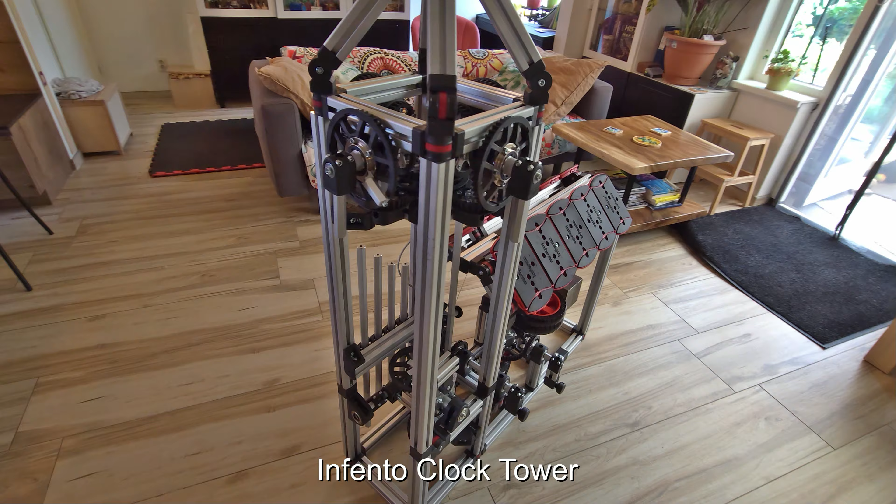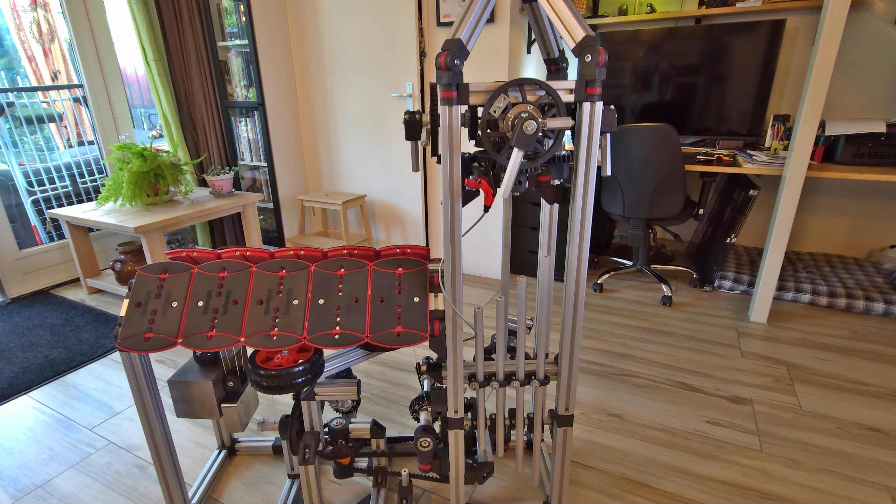The clock tower is made almost exclusively from Infento components, with only a few exceptions which I will explain through the video. I use Infento version 1.0 because I bought the first Genius set already in 2019 and I extended it by many extra parts since then.

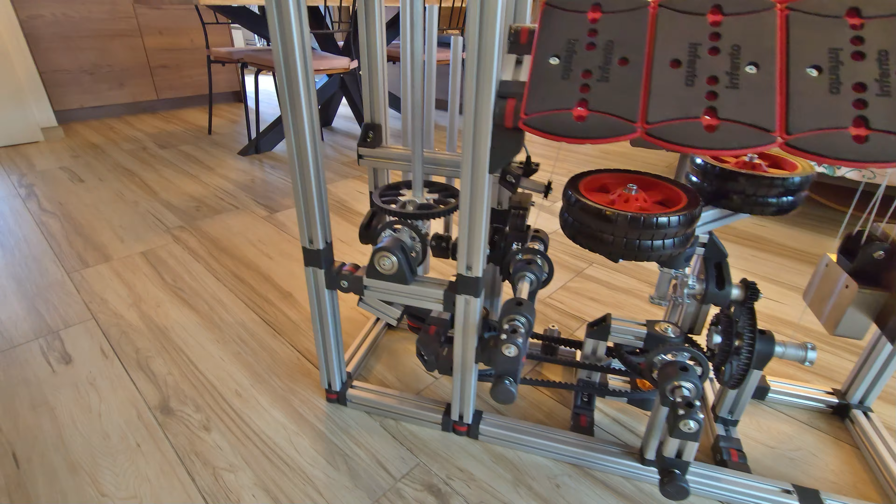So let's jump into the functions. Clock needs energy to run. I could have used an Infento electrical motor, but that would have ruined the beauty of the replica of an old mechanical clock. I got a 20 kg weight, which can be lifted about 40 centimeters above the ground.

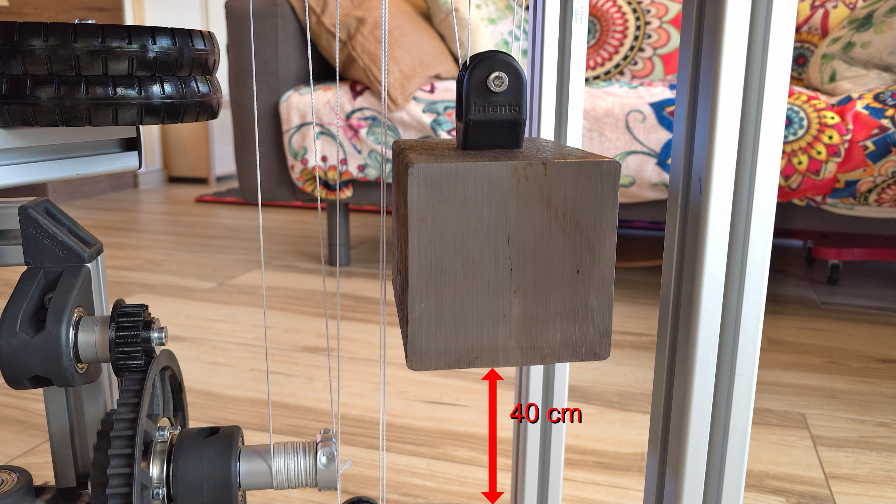The heavier the weight, the slower it can be lowered to produce the same mechanical work. I use pulleys to trade pulling force for longer run. The pulleys are 3D printed and I presented them already in several previous projects.

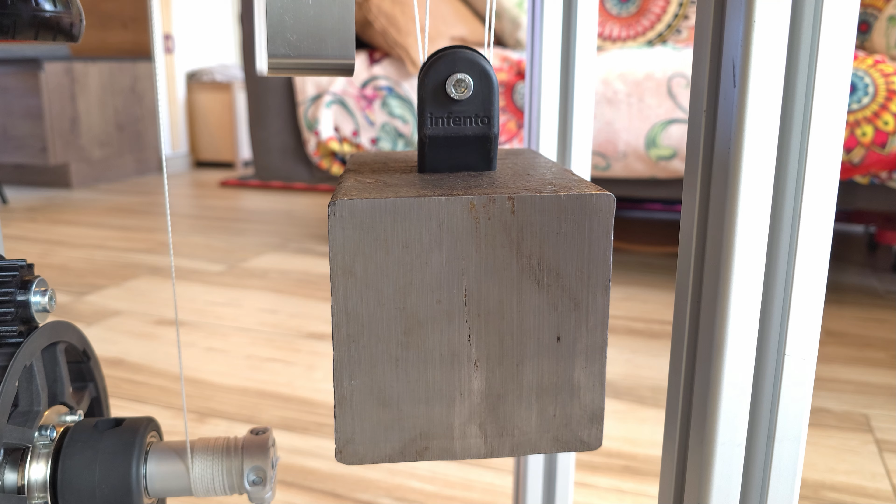After many tests, I set the pulley reduction ratio to 1:4, which means that the acting rope pulls with 5 kg or 50 newtons of force over a distance of about 160 centimeters.

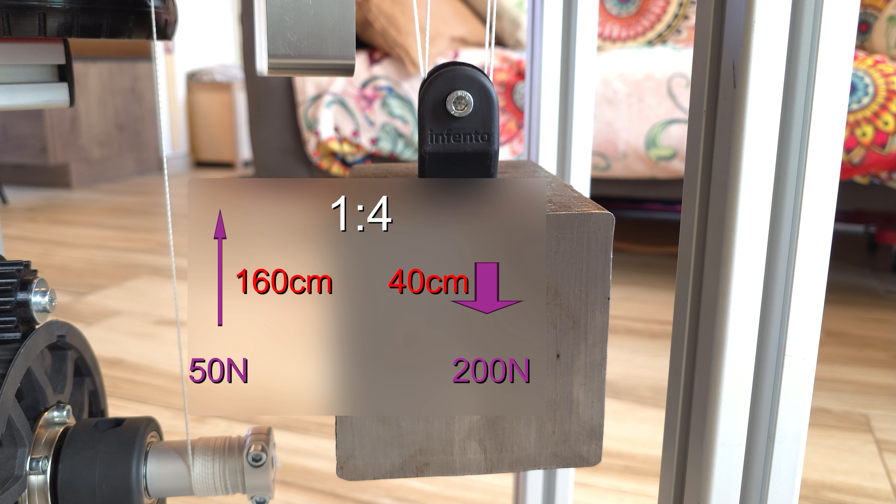The most force I needed was obviously to overcome friction in the system. And with 25 gears, 2 tooth belts and 17 active bearings, the clock has plenty of friction.

To be able to wind the clock, so to lift the weight, I needed to add a ratchet mechanism. For that I use an Infento freewheel, which can freely spin in one direction but locks in the opposite.

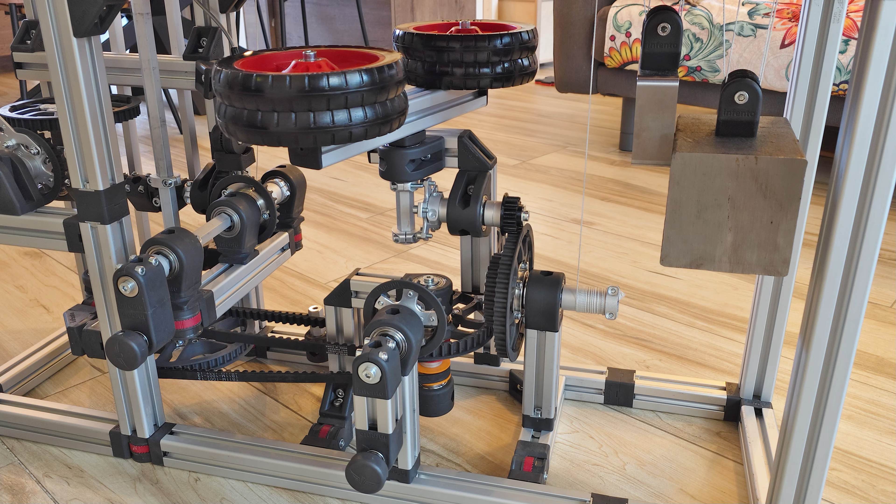Another component mechanical clocks usually have is some kind of escapement mechanism to generate the ticks. After some reading, I decided on the verge escapement with foliot. The escape wheel, also called crown wheel, is here created using an Infento flange with bolts, and the foliot is this horizontal oscillating bar.

The benefit compared to the verge escapement with pendulum I used before is that it can generate slow movement in more compact form. As you can see, one tick-tock cycle is about 2 seconds. A pendulum with the same period would have to be about 1 meter high.

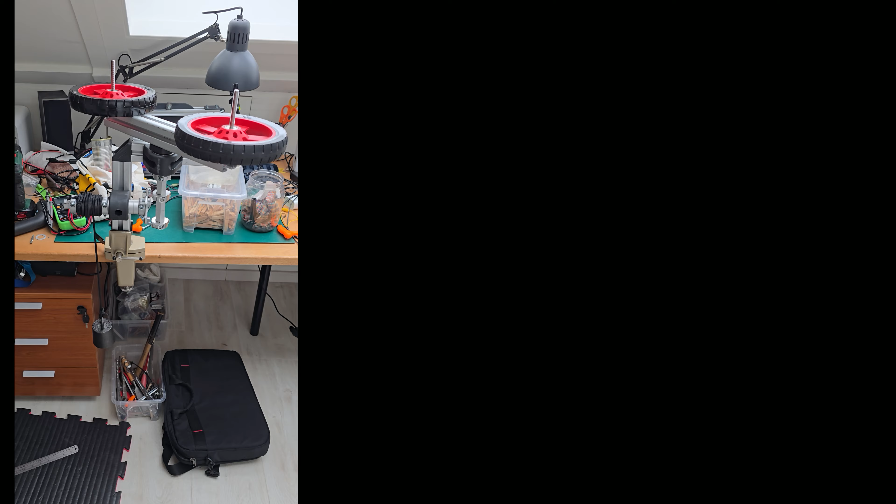The speed is adjustable using the weight and position of these 7-inch wheels mounted on the foliot. More weight and further from center, more inertia the system has and slower it accelerates when the same momentum is applied. The important bit is of course this verge or crown wheel.

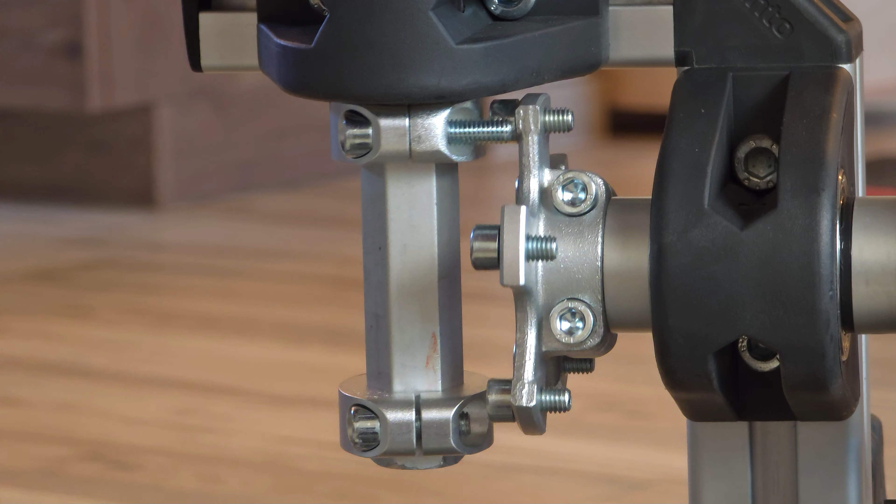In half of the period it accelerates the foliot in one direction until it slips and then the opposite tooth takes over to stop and accelerate the foliot in the opposite direction, and so on.

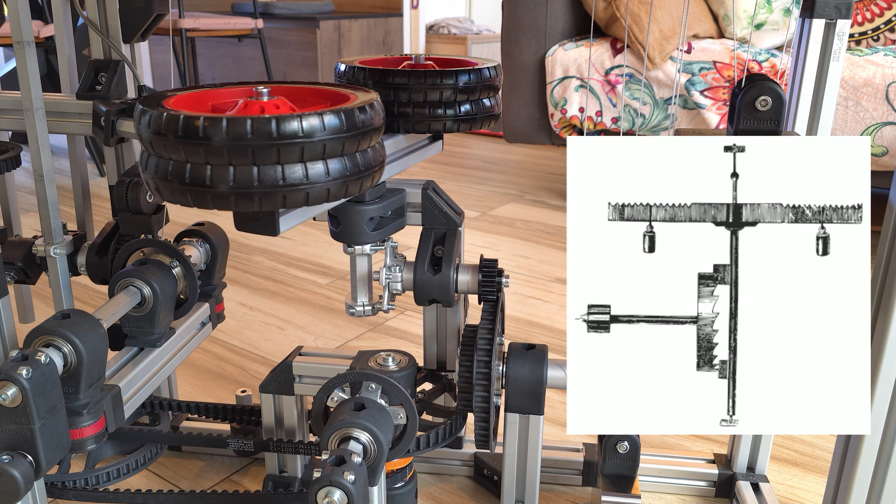On Wikipedia you can read that the verge escapement with foliot is the oldest known type of mechanical escapement used for timekeeping, dating back to the 13th century.

The crown wheel gets its energy from the weight via this 3D printed 13-tooth gear. I could have used the original 26-tooth gear, but I wanted to get more tick-tock periods per weight movement. In this configuration, the total runtime is about 10 minutes before the weight gets on the ground.

So, with the energy source and escapement mechanism, we have good basics for a clock. The most important aspect of this project was for me to create a functioning 4-phase clock tower. This is actually how I started the project.

Just playing with 2 standard Infento gears in CAD and trying to get this mechanism to work. I recently figured out that I can use the gears as bevel gears attached at an angle.

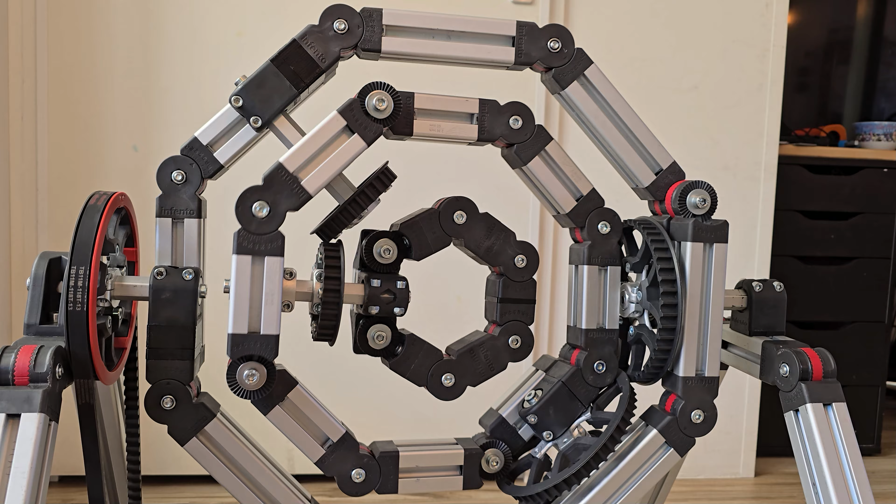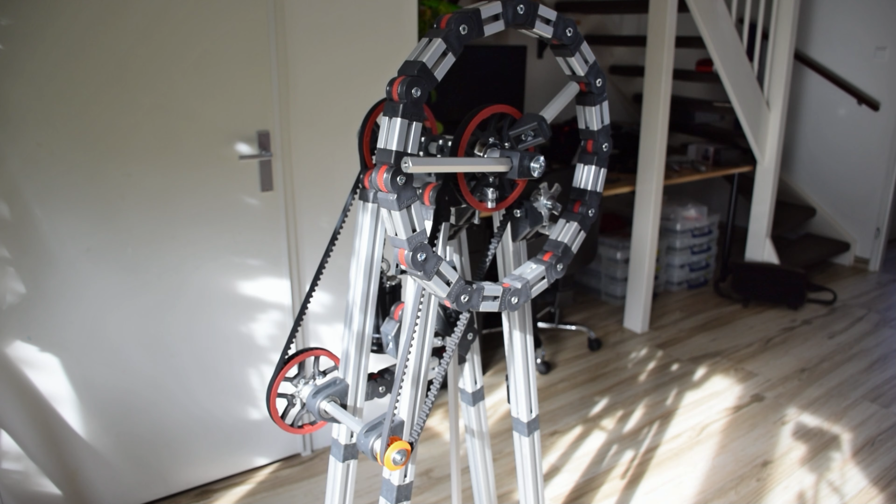And from my previous clock creation, I knew that I have to use freewheels to be able to put the minute and hour hand on one axis. If you didn't see that one, please check that video. If you got so far here, I think you will like it as well.

So I started just with the basic idea I had in my head, but in this configuration the gears could not move, they were interlocking each other.

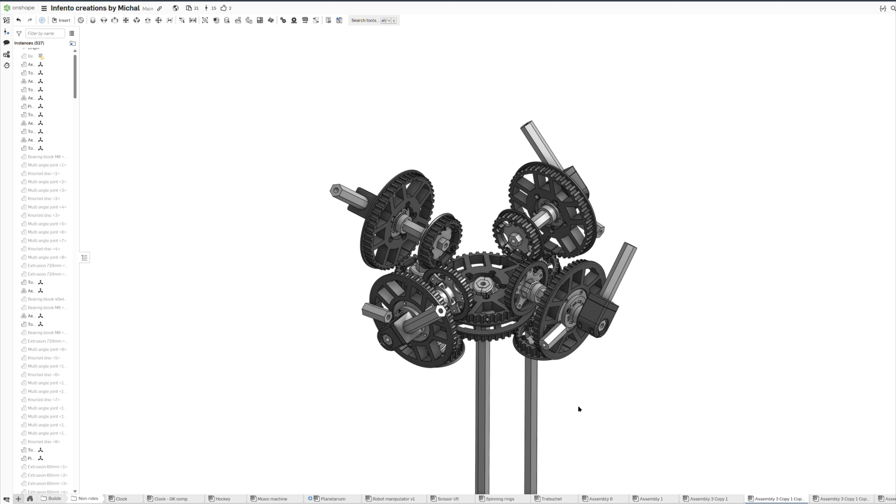The eureka moment came when I figured out how to drive both the hour and minute hand on all 4 faces without the gears colliding. The important bit is that the horizontal bevel gear must be larger than the vertical ones to prevent locking.

That was easily done for the minute hand, but for the hour hand I had to add 4 intermediate gears to create the necessary space.

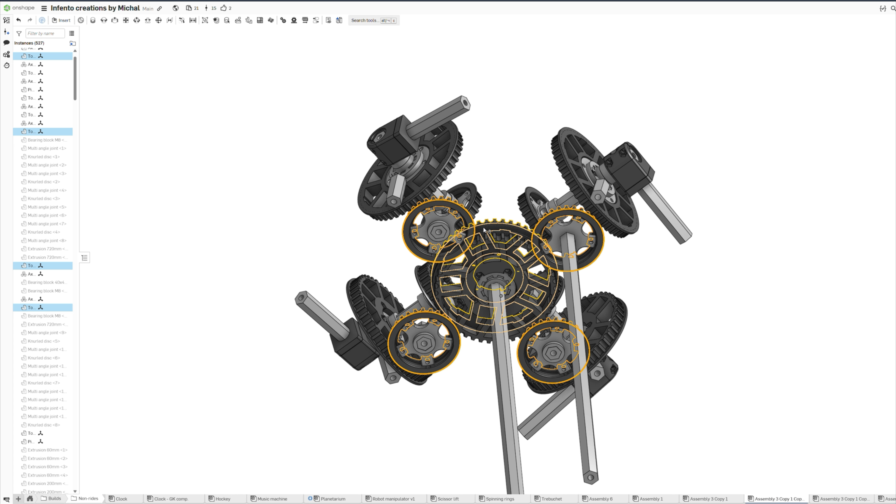And where 2 gears are on one axis, I use freewheels in the correct orientation to allow independent rotation. Fortunately, the clock needs to run only in one direction. The minute hands are driven by the center axis and the hour hand by the other one.

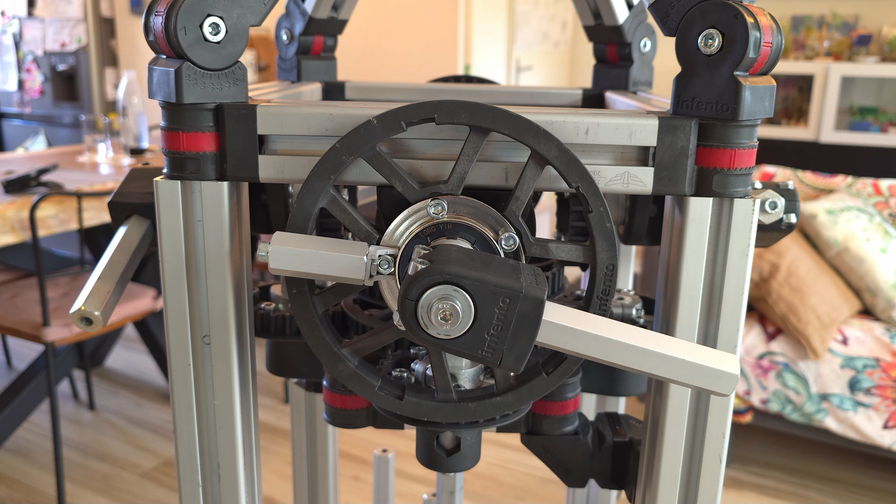They are linked at the bottom by a belt system with other gears to create the proper hour-to-minute movement ratio, which I will try to explain next. So you know the minute hand needs to rotate 12 times for one revolution of the hour hand.

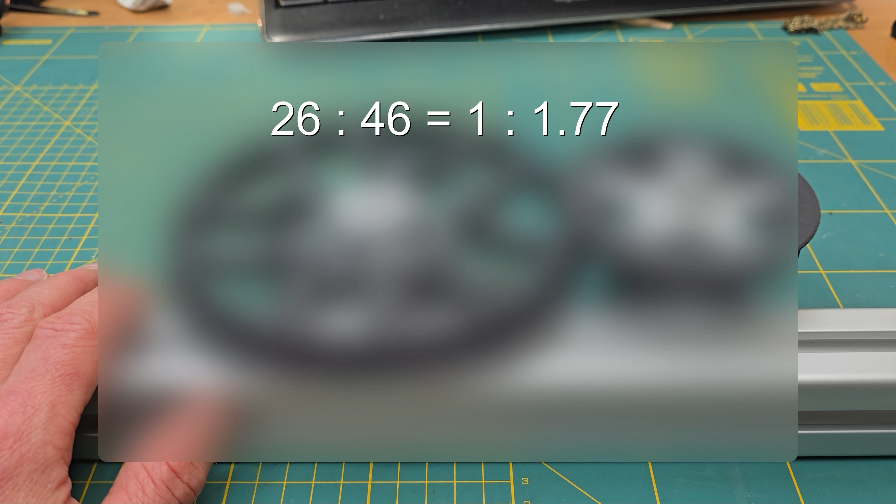But looking at the original Infento gears, we have only 26 and 46 teeth. That means with one gear set, I can only create a ratio of about 1 to 1.77. Using only these gears, I could stack 4 of them to get a 1 to 9.8 ratio, or 5 to get 1 to 17. Both solutions are not optimal and visually probably very noticeable.

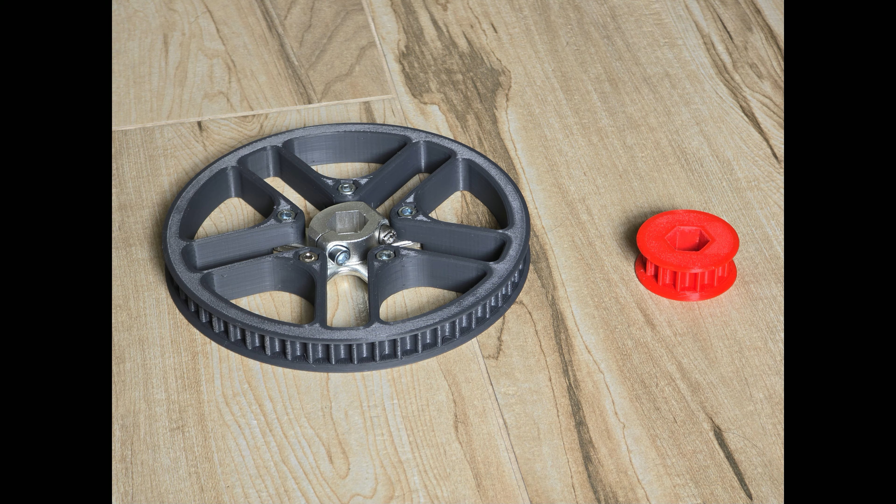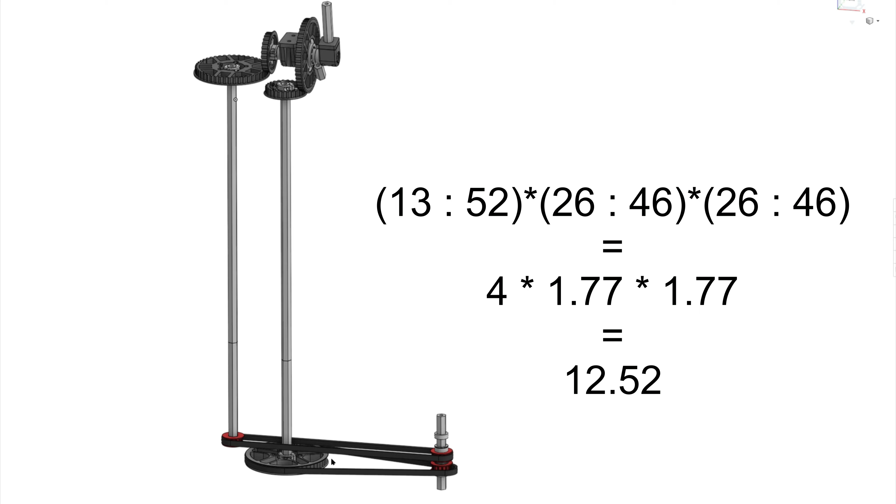Fortunately, I had around some custom 3D printed 13 and 52 teeth gears from previous projects. So with one 13-to-52 and two 26-46 gear sets, I was able to create approximately a 1 to 12.5 hour-to-minute hand movement. It's still not perfect, but now more convincing.

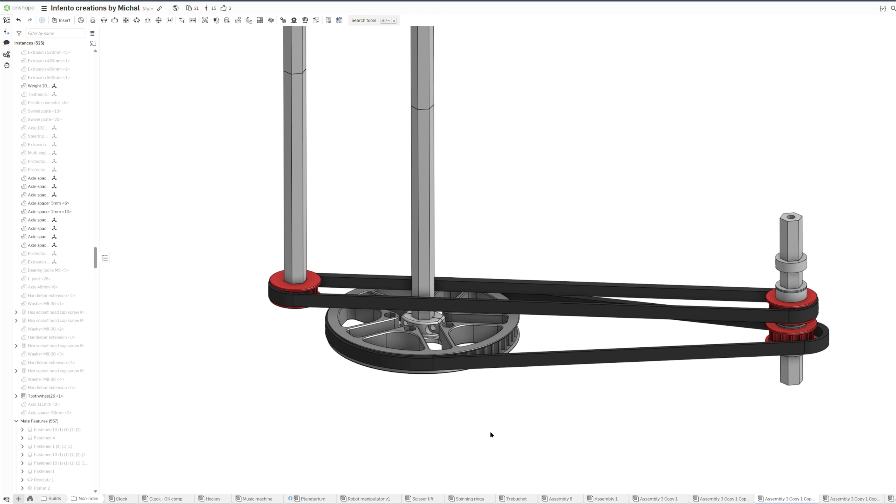The good news is that the two 26-46 reductions are already in the top of the clock tower, so my job was only to link the two axes together with 13-to-52 gears and a belt. After fiddling around with different configurations, I settled on using another two 13-teeth gears and linking everything with two 100-teeth belts. I tried using the original gears, but I didn't like the result — joining an axis was always oriented somewhere awkwardly.

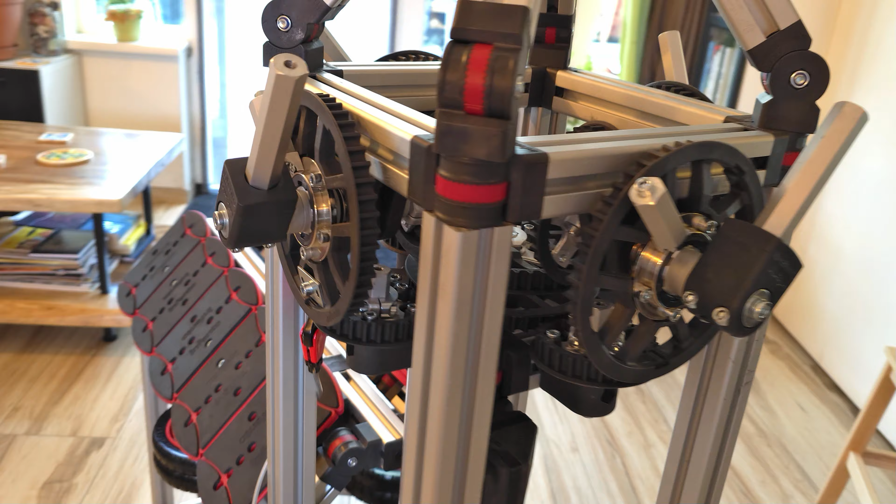The next step was to combine the clock tower with the clock mechanism in a neat and relatively compact form. In a normal clock, the minute and hour hands are made as light as possible to reduce mass imbalance. I wanted to use Infento axes because I think they give a nice look to the clock, but their weight is not insignificant, especially when there are 4 of them.

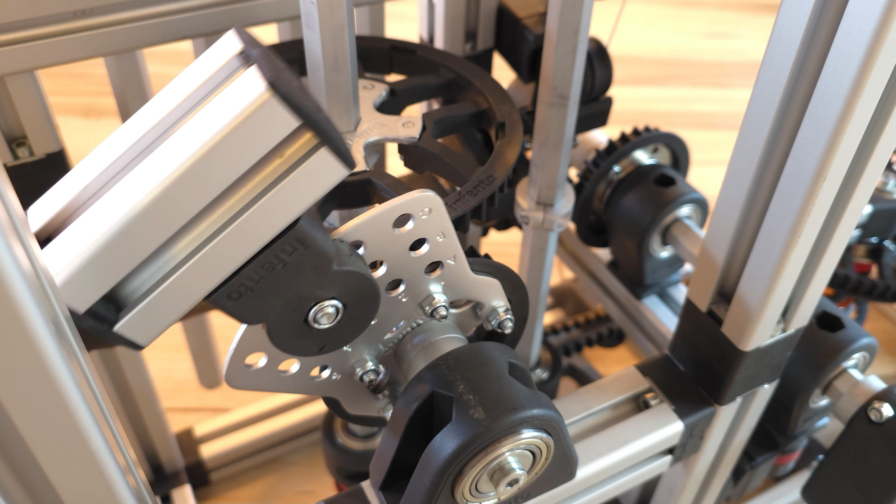I was considering 3D printing lighter hands, but then I decided to add a balance weight which counteracts the mass imbalance. A bit of mass tuning and now the movement is smooth. The hour hands are much lighter and rotate much slower, so I didn't need to compensate for them.

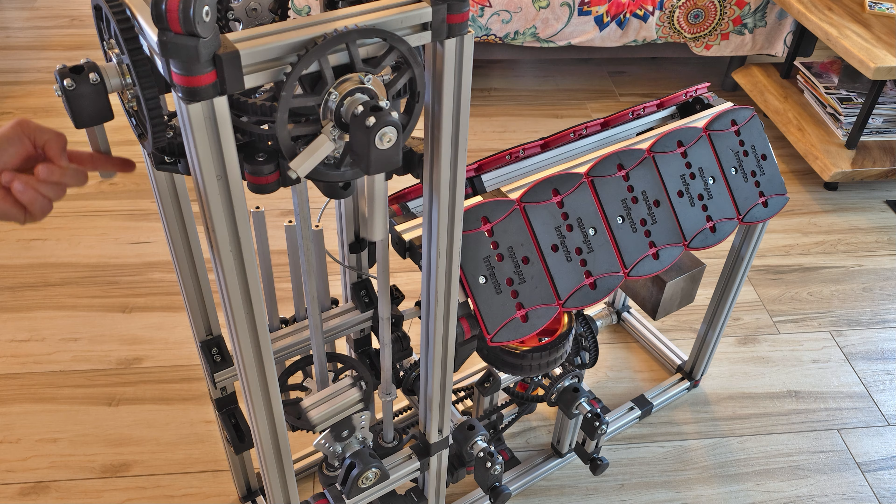In the way I made the crank to wind the clock, I needed to add two freewheels — one to decouple the clock movement, and the second to decouple the escapement mechanism from the drum during winding. This also allows adjusting the clock when moving the hand in the clockwise direction. And that's basically it for the clock.

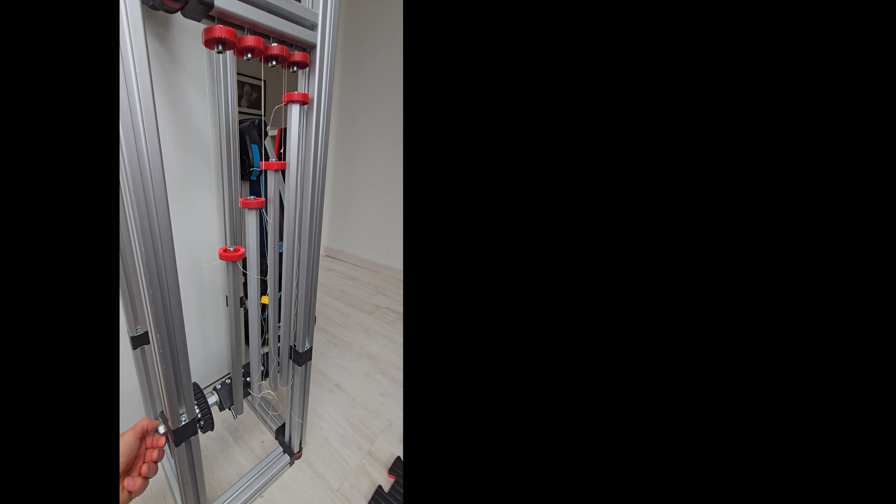But then I was thinking, what would a clock tower be without bells or chimes? I don't have any bells I could use, but from my previous projects I had a little experience making chimes using Infento axles. My goal was to create a simple two-tone melody. After some testing, I settled for the double-tone chime.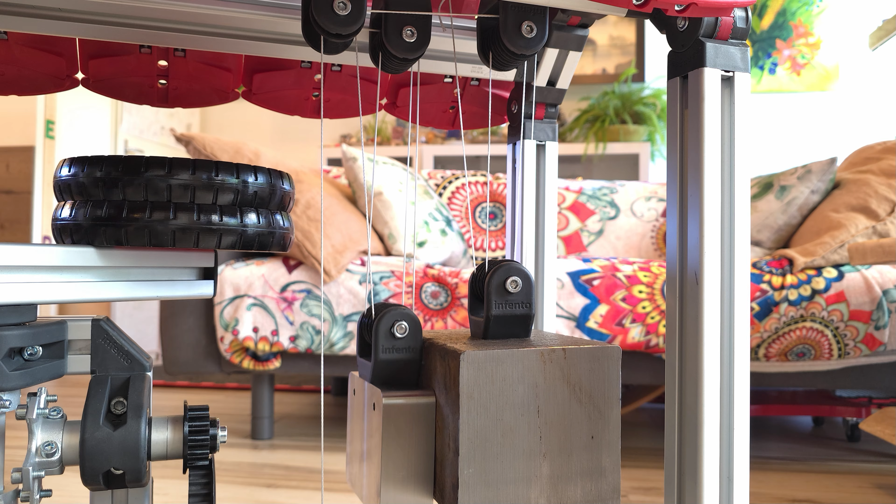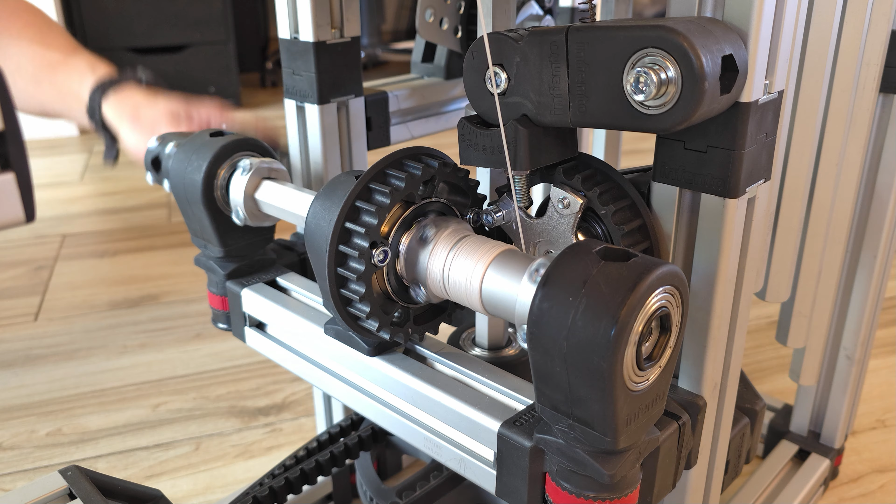The chime has its own energy source in the form of a smaller 3.5 kg weight. A pulley system with a 1 to 4 ratio is again used to trade pull force for a longer run, and a freewheel allows winding its drum without moving the rest of the mechanism. The crank again neatly detaches when winding is done, to prevent mass imbalance.

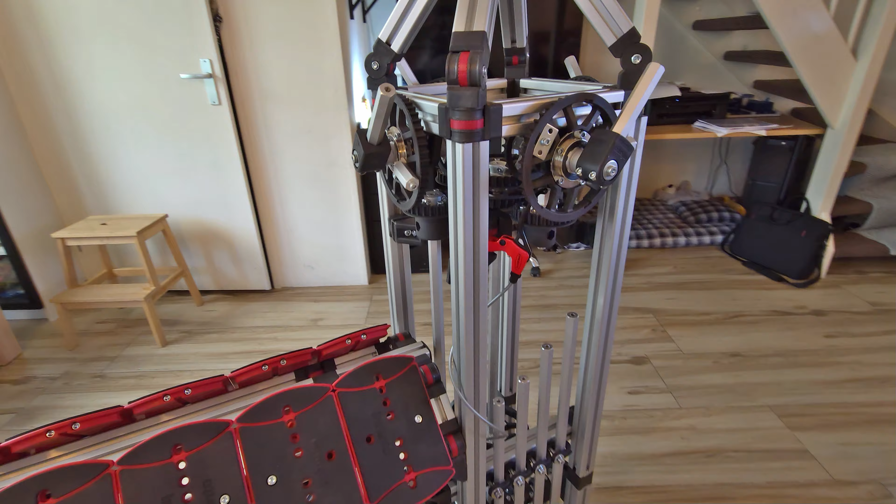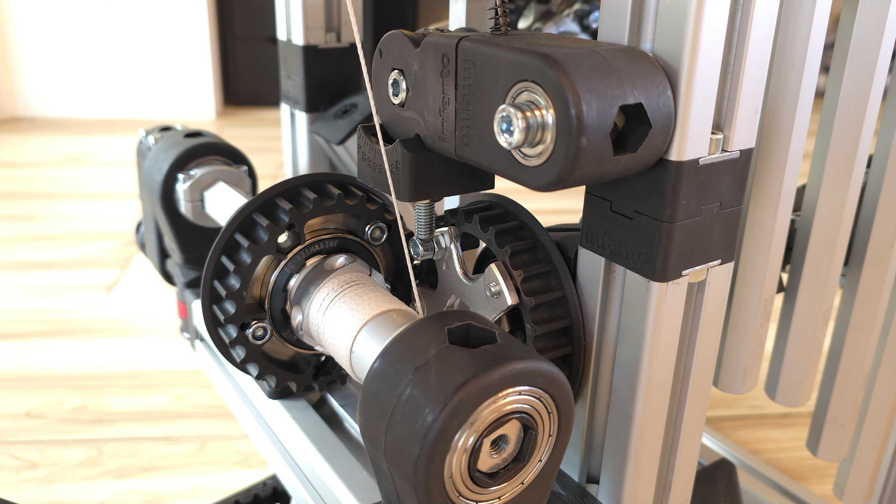Triggering the chime is quite obvious, but required a bit of trial and error to get it working. I use a bolt in the proper place on the hour gear, which pushes the Infento brake lever. A Bowden cable then translates the movement to pull this pin and the chime starts.

So this is it. I hope you enjoyed the explanation and maybe learned something new. I really appreciate it if you watched until here. Maybe now you want to check out some of my other videos.